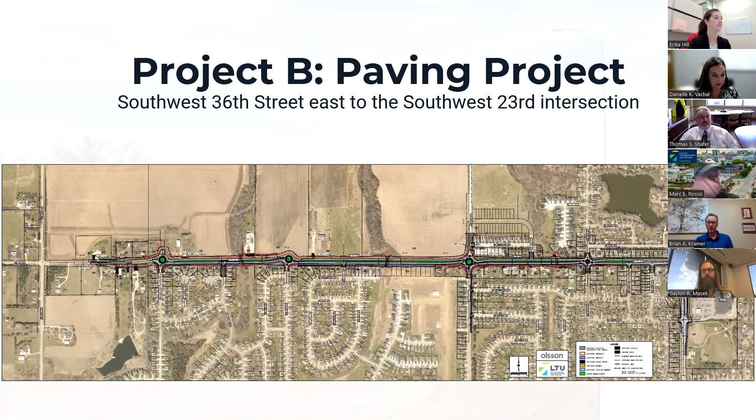Just to give you a little better view, I'll have you go to the next slide. We zoomed in a little bit, and this shows the gray area is the new pavement. The bright green is the raised grass median that will be constructed. There's a thin yellow line on the north side that shows the sidewalk we're building, and the purple is wider because that's the 10-foot trail that will be constructed along the south side. You can see the roundabouts we're constructing at Southwest 27th and Southwest 24th, which will provide safer turning movements for those in and out of the neighborhood.

During construction, we are proposing that the contractors start on the east end and work to the west as they make their way down the project. We'll be putting this project out for bid later this fall and will have a contractor hired, so at our next public meeting in the spring we can go into more detail regarding some of that construction phasing once we work things out with the contractor.

Here's that next section. We would have the contractor continue to work west, very similar. You can see the end intersections, the roundabouts constructed at Southwest 31st and Southwest 27th. We would ask generally that the contractor phase those so that the neighborhood would still be allowed access to their homes and in and out of their neighborhoods. You can also see the box culvert constructed there in the middle that will help with some of the storm drainage we're collecting within the new roadway.

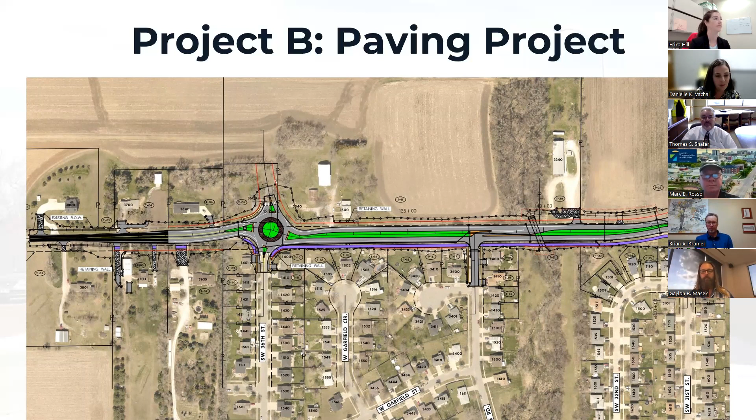Absolutely. We have been working on the utility work to prepare for this project. Last March, we started removing trees, and all of those within the city right of way were removed. We had Black Hills out there relocating their line, so that was one less thing to worry about. LES has also been out there since March working on getting their overhead power line put underground, and it sounds like that's going well, and it should be completed by the end of the year.

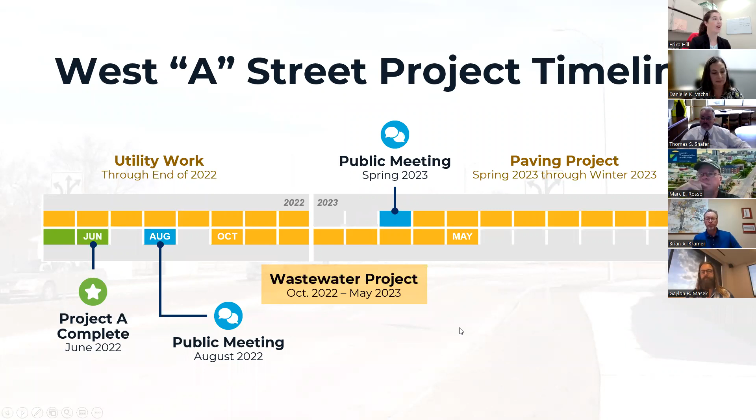Hello, everyone. This is Brian Kramer, the superintendent of collection at Wastewater, and I will be the city's project manager for the wastewater portion of the project. We are starting our project in October of this year.

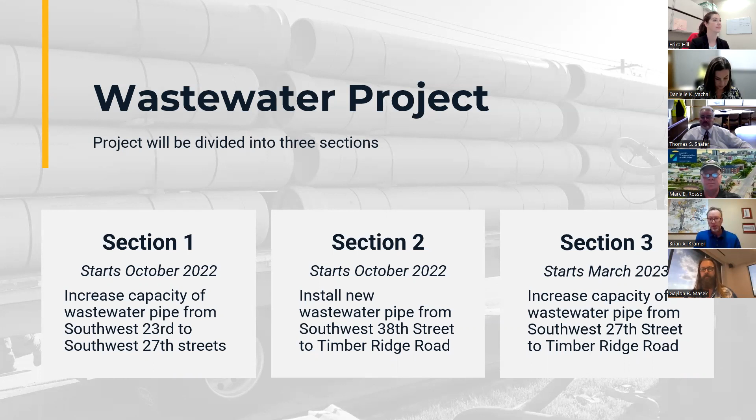These two sections will both start construction in October. We have already bid our project and have a contractor on board, and we've worked out this construction phasing with them for the three different sections. Both sections will start in October with the same contractor, but two different construction crews. Section 1 on the right will lower the existing pipe and increase its size. Section 2 is installing a brand new pipe where none exists, to help accommodate the development on the north side of A Street.

This is a detail shot of section 1. It's starting at Southwest 23rd Street, right where the previous project left off. There are two different views on this page. At the top is the plan view, looking down onto A Street. At the bottom is a longitudinal cross section of the street, which we call the profile view.

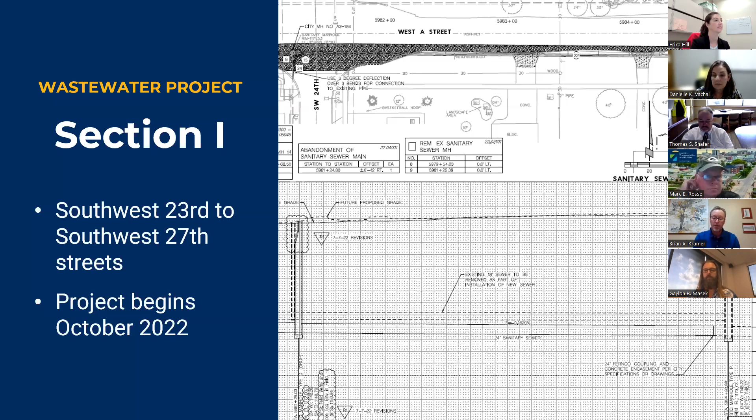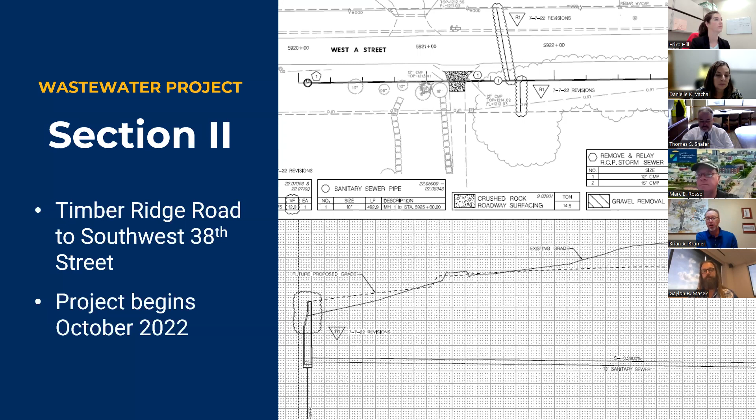Now I'll talk about section 2. This section starts at Timber Ridge Road and goes out to the end of the paving project, about Southwest 38th Street. This is installing a brand new 10-inch pipe where there has never been pipe before, to accommodate the development that's going to occur on the north side of A Street. This should also start here in October of '22.

Now moving on to the third section, in the middle. It's awkwardly numbered, but that's how it ended up. This fills the gap between sections 1 and 2, and you can see the traffic flow has changed slightly. With this section closed, people on the west end of West A won't have a way back through the neighborhood to get east, and they'll have to go out to Southwest 40th and go around.

But this will be carefully timed so that people north of A by Southwest 25th Street can have a way out. That intersection at Southwest 27th will be critical, with timing needed to keep the traffic flow moving back and forth.

This is scheduled to start in March of '23, after the other two sections are complete.

I'll go to the next slide and show you a plan and profile again of section 3. If you look at the profile, you can see the new pipe is lower than the old pipe, and there's a manhole going in the exact same location, represented by the solid lines. This pipe will be upsized to 18-inch and 15-inch sizes, and it will close the gap between 27th and Timber Ridge Road.

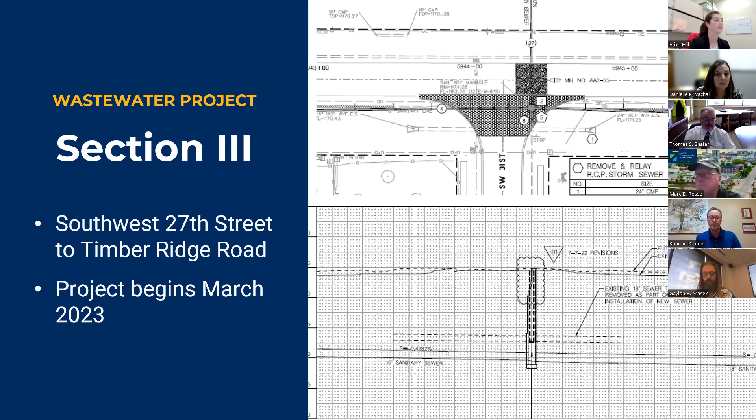Some effects the wastewater project will have on your commute: when each section is under construction, that piece of West A will be totally closed, with no traffic moving back and forth.

Part of the reason is we have to open cut the pipeline, and it's about 20 feet deep. That means our trench at the top is about 40 feet wide, and it progresses into the south lane of A Street, right up to the center line of the road. It would be very difficult to keep any traffic moving in the one lane left over, with construction traffic plus access for local residents.

Speaking of those with driveways on West A, we will be maintaining that access, except for a couple of periods during the project, maybe a one or two day period, where we actually have to put the pipe in exactly where the driveway is. Access then will be an issue we'll have to work out with the property owner.

Also, the main detour for overall city traffic will be pushed up West O Street or down to Van Dorn. We want to keep anybody who doesn't live in the area from driving through the neighborhoods to get across and around the construction.

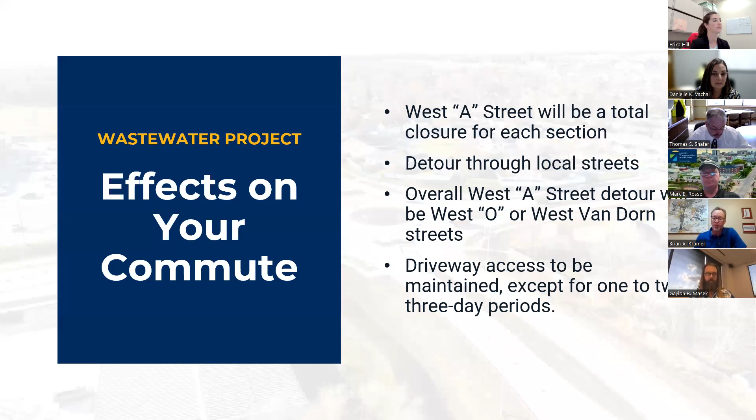These aren't listed on the slide, but I'll talk about them anyway. Some advantages of this project for the neighborhood: we're replacing a clay pipe put in during the 1970s with modern plastic type materials, removing that old cracking pipe from the ground. This reduces the number of joints between pipes by about 80%, increases capacity of the pipeline, and greatly lessens the chance of a backup occurring.

Those residences already connected to the pipeline on A Street will get the benefit of having a new tap installed as part of the project.

Additionally, in September, Wastewater and our project team will be contacting all property owners who have driveways onto West A or connections to West A. We need one-on-one communication to find out where your current service tap is, and to discuss your driveway and how to give you access in and out of the construction zone. This only applies to those with driveways on West A. Anybody whose backyard backs up to it, your sewer goes a different direction, and you shouldn't be impacted directly, other than detours on the roadway network.

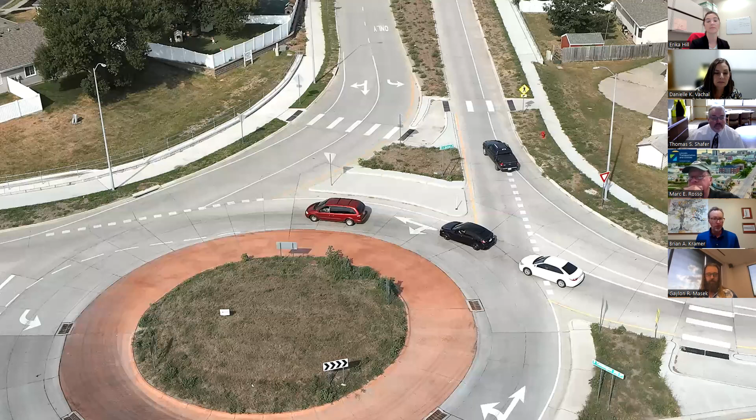You'll find my contact information on the web page at lincoln.ne.gov West A. Again, my name is Brian Kramer, and I'll be able to answer the wastewater questions for you. So please contact me. I think we're back to you, Erika.

All right, thanks, Brian. Just a reminder on communication moving forward: the next public meeting to update you on progress will be in the spring of 2023. We will also have all the updates from today on the website now.

It should be live now. You can go to lincoln.ne.gov/WestA, or if you forget that, just go to lincoln.ne.gov and in the search bar type in West A and it will come up that way as well.

Again, we will work to have smaller updates posted on the West A Neighborhood Association Facebook page. I feel like that's been working pretty well to get the word out, especially when detours come up, things like that. So we will continue to do that.

Thank you guys so much for joining us. Just a reminder, this is such a big project for the city of Lincoln. Once completed, this new smooth pavement will really offer a much more enjoyable commute, and just a lot of really great infrastructure that people can use as the city continues to grow, especially out in that area where a lot of stuff is happening right now.

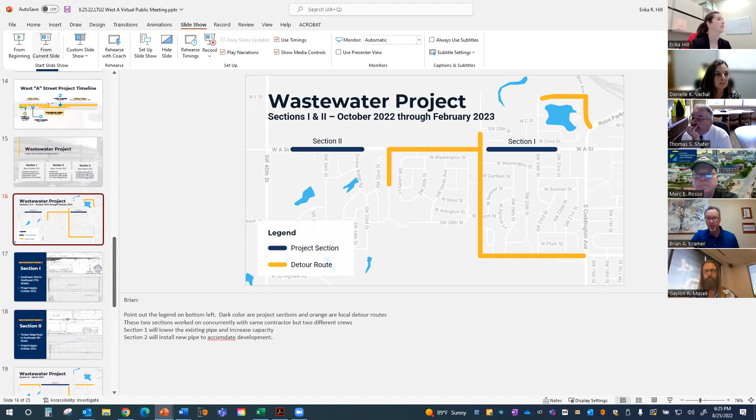The intention is not to send people down towards Springview, but that they make their way over there by, I guess, what would be Southwest 31st, where they could follow the orange path, get back up onto A Street, go over to Southwest 27th, where it's closed again on A. Then they go south on 27th and take South Street over back to Coddington Avenue.

But the option would exist, I guess, for people to take the Springview Road, but I wouldn't think that would be the preferable route for most people. We certainly will not purposely detour people that way.

Who will contact us for the 1 to 3 days where we cannot access our driveways? That will be wastewater construction management people, either myself, Brian Kramer, or possibly Darren Brown with wastewater.

Next question. When will the intersection of Southwest 24th Street and West A be closed for this project? If you look at the same map here, it's really almost the very first place that we start. We're going to start at 23rd, work towards 24th, and continue. So I can see that being closed starting the middle of October.

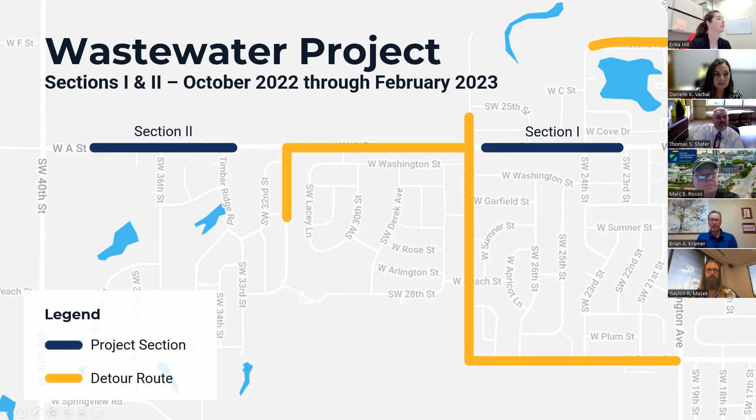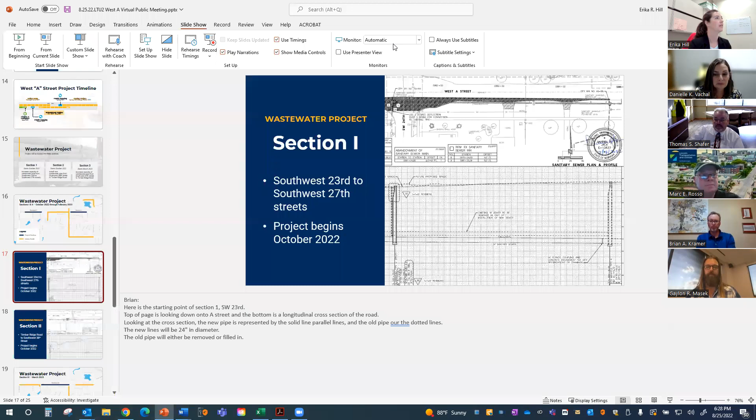Does anyone have any more questions? We are at the end of all the questions that I have. Let me check my email real quick, just to make sure I don't have any more. Okay, no more questions that I'm seeing.

One more question: I would like to repeat the concern for mowing. The ditches are full of tall weeds. Since the trees were removed, the ditches have not been mowed. So we'll need to look at that.

Another question: during this road construction, are the ditches going to be mowed? For Project B, it sounds like. During the road construction, I guess it's hard to say. We do ask the contractor to take care of the construction area. But like Thomas had said, if there's no actual construction going on, it might be the responsibility of that property owner.

What will the mail carriers do during the closed time to drop off the mail? That's a really good question. I'm making note of that one because I don't have an answer for you right now. So we can get that answer, and then I can post it on the West A Facebook page. I know they don't like to enter a section of road that's closed, or a construction area, whether they choose to set up a remote location or everyone must go to the post office to get that picked up. That's a great question, and maybe it changes depending on the type of project. That's maybe why we're all a little dumbfounded as to what the answer is specifically for this one.